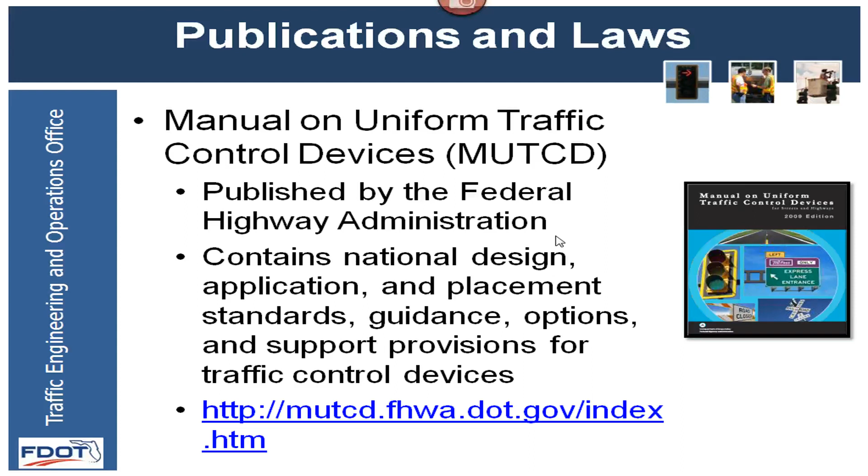Thank you, Raj. Yeah, as Raj said, the Manual on Uniform Traffic Control Devices is kind of our adopted manual. It's published by the Federal Highway Administration. This contains all national design applications and standards, kind of the paving for any traffic control devices that we use. Now Florida does go above and beyond with some special guidance and criteria, and we'll mention some of that within our traffic engineering manual, some of our rules, and some of our design standard index in other slides.

By definition from the MUTCD, a traffic control device is a sign, signal, marking, or other device used to regulate, warn, or guide traffic, placed on, over, or adjacent to a street, highway, private road open to public travel, pedestrian facility, or shared use path. So we will do our best to break that down into 3 areas - signs, pavement markings, and signals - and give you an overall perspective of what those are.

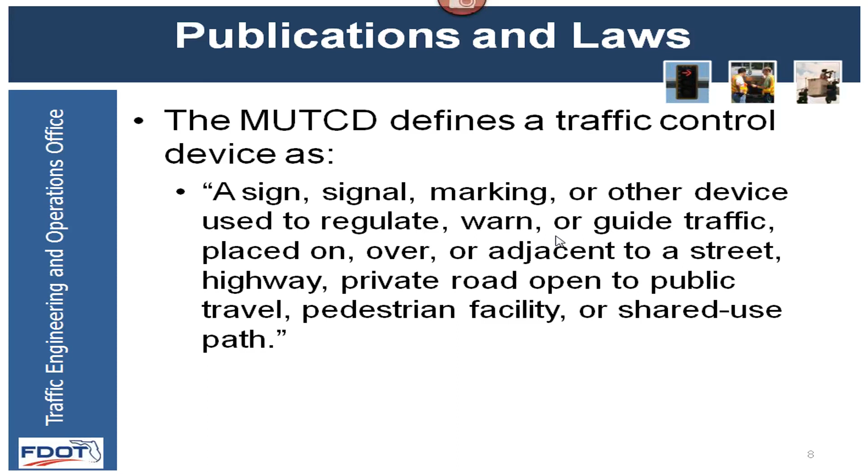And I think Angela's going to mention some more information on this. Yeah, so we get a lot of requests for traffic control devices on state roadways, and local agencies do as well. According to the Manual on Uniform Traffic Control Devices, in order for these to be effective, they've got to fulfill 5 basic requirements: the traffic control device must fulfill a need, command attention, convey a clear and simple meaning, command respect from road users, and give adequate time for proper response.

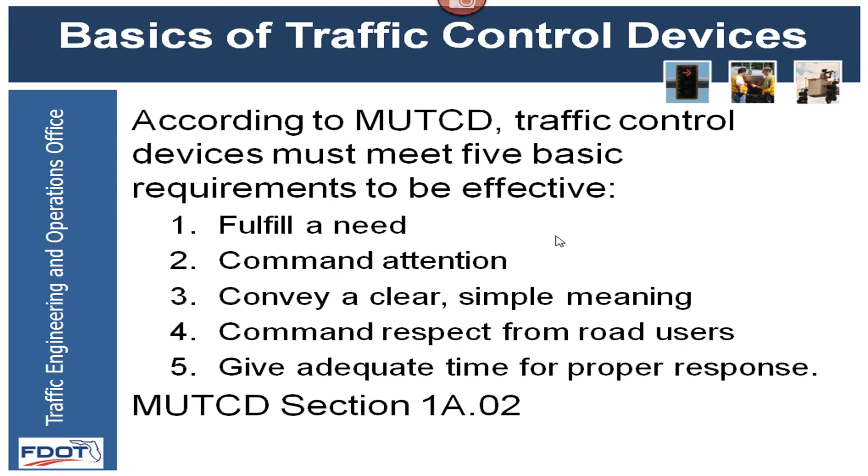So as I mentioned, we may field a lot of requests from folks who've got good intentions about installing new traffic control devices along roadways that they think might make the road safer. But if there's not a need that we're fulfilling, or if we're not conveying a clear message, those traffic control devices may not be effective and may not have that effect of improving safety on the roadways.

All right, thank you Angela. This is one of our documents that we publish from the department side, the Traffic Engineering Manual, also known as the TEM. The purpose of this is to provide traffic engineering standards and guidelines to be used on the state highway system for our designers. I did a presentation on this back in July at the Design Expo, and gave a 101 on what the TEM was. I learned quickly when I joined the department that I didn't know what the TEM was, so coming from the design side, I had a feeling it would be a good exposure point at that time. So we did a little 101 session then, and we'll probably do some more in the future, but this is kind of where we hold our guidance for traffic operations.

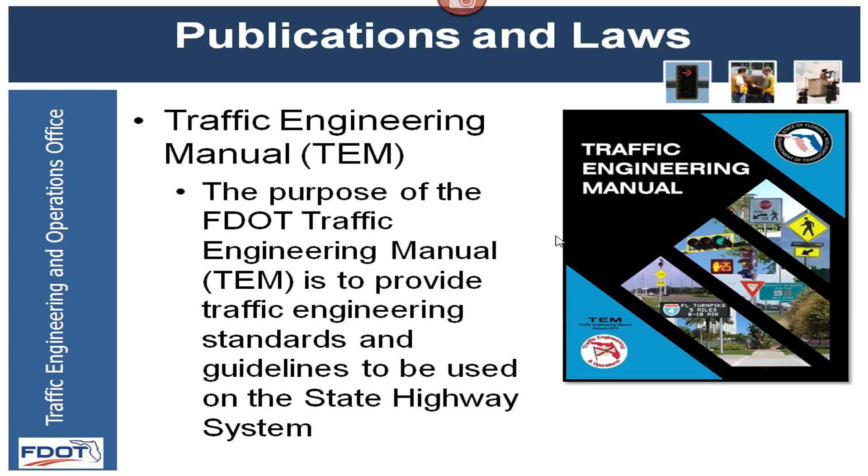And also, I think Raj is going to help me tag team this.

This is where we get to talk about our products and what we allow out there on the state highway system. All traffic control devices installed on the state highway system, as far as material, have to go through proper testing, meet specifications, and be listed on our approved products list, which I think we still kind of call the qualified products list also.

Right, correct Raj? If I can add to what Chris mentioned, we have the Traffic Engineering Research Laboratory, or TERL, that is part of the Traffic Operations Division here in Tallahassee. It's a pretty intense laboratory where all kinds of experimentation is done before any device is approved for use in the state of Florida. Any traffic signal you see, any material used on signs and pavement markings, everything is more or less approved and becomes part of the APL.

Now there may be situations where a new vendor comes up with a specific product, say for wrong-way incidents—we've been hearing a lot about wrong-way crashes lately. We have several vendors who want to showcase a particular product for application. When that takes place, as a temporary aspect, the TERL office will do all the testing and may decide to approve a permit for testing the device at a specific location for a specific application. That may not be on the APL, but it goes through a permitting process. All said and done, almost all the devices you see out there with large-scale application are part of the APL, the approved product list.

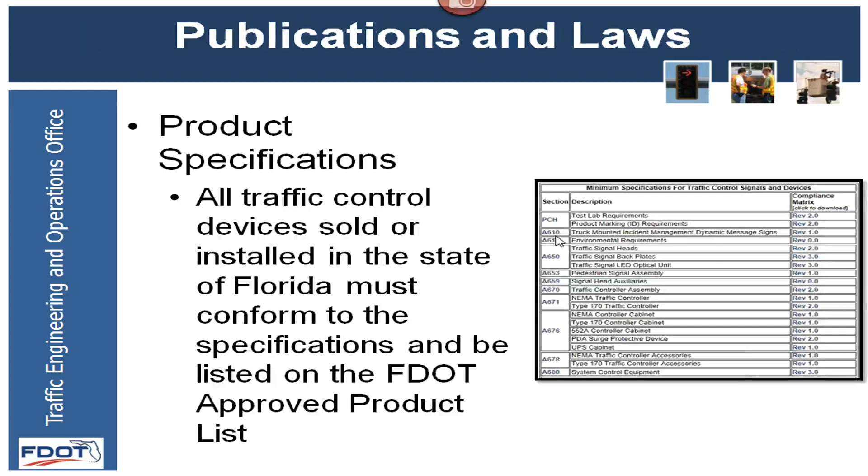Okay, all right, signs. Kind of jumping into the agenda, the meat of the agenda. Part 2 of the MUTCD talks about signs.

These are broken up into quite a few sections. I'll do my best to give a basis as to all these, and again, if there are any questions, stop us. This is the starting ground for the department and how we come up with our guidelines for the Traffic Engineering Manual and the Design Standards Index, as far as any kind of signs and anything we're putting out on our state highway system. And it's not just limited to static signs—we also deal with dynamic message signs, portable changeable messages, and so forth.

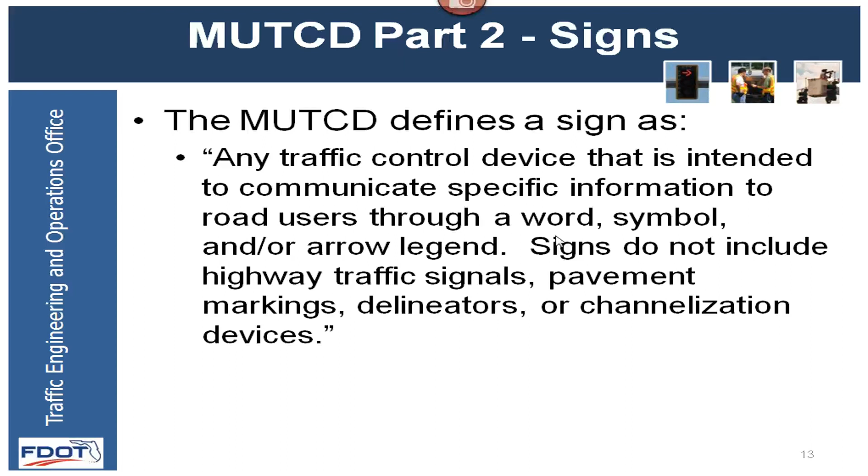Next slide. Okay, the definition of a sign from the MUTCD is any traffic control device intended to communicate specific information to road users through word, symbol, and/or arrow legend. Signs do not include highway traffic signals, pavement markings, delineators, or channelization devices. So there is a difference.

Like I said, the MUTCD kind of breaks it up—I called it subchapters, I didn't know if there was a better terminology, but there are 13 of them. It talks about regulatory, warning—there are 2 sections on guide signs, one for conventional roads, freeways, and expressways. Toll road signs, preferential managed lanes or managed express lanes would be an example. General information, general service, we get into logo signs, TODs or tourist-oriented directional signs, changeable messages as I mentioned earlier, recreation and cultural interest areas, and emergency management.

Within those areas, the department does a good job condensing that. We have a Florida Administrative Code—I've got a slide on that I'll bring up—that's our state highway signing policy, and I think it's 5 parts. We have limited access, non-limited access, we talk about place name signs, wayfinding, and our TODS program in there.

As far as regulatory and warning signs, we do refer back to the MUTCD on that. We don't get real specific as to anything proprietary to DOT for that—it's a national thing we go by. All sign placement and installation purposes are done per the MUTCD. We don't have any specific extra information we produce for that stuff.

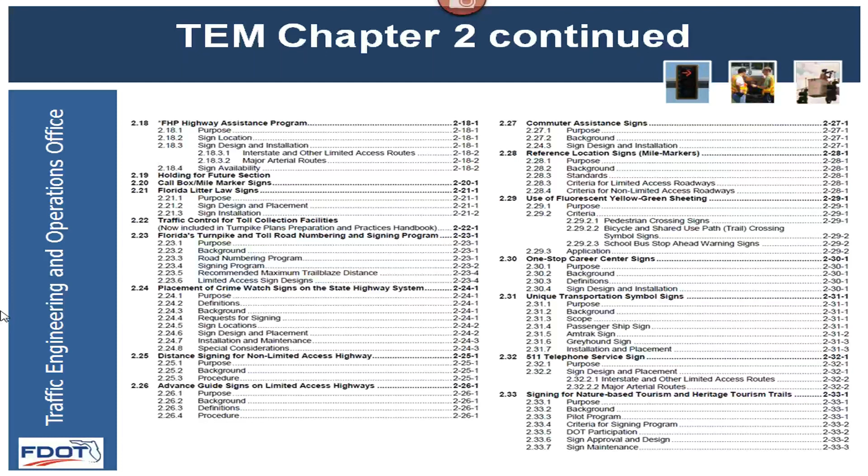And of course, going to the end of it, we're always adding to this. This is not like some of the other manuals you might be used to, PPM, Florida Green Book, which are updated annually. This can be updated on the fly. That's the great thing about the traffic engineering manual.

And again, it's guidance. If you're going to use this or participate with this language, there are shalls and shoulds in here. So if you do use these sections, make sure you're following the verbiage in there. But again, I would encourage anybody, if you're not on the mailer list, please get on it. You can email Raj, myself, Angela, or contact us here, or I'm sure Dennis has our information. We'd be glad to add you to that list.

Okay, and like I mentioned, coming off of the MUTCD, we have a Florida Administrative Code, Rule 1451. This goes through a rulemaking process. We are currently in there right now from last year. We did an update to it. We did several updates to it. But you can see the layout and the breakdown for it.

We've got a major revision, overall review of this last year, and like I said, it's going through the process in December, and it should complement some of our other manuals within the department.

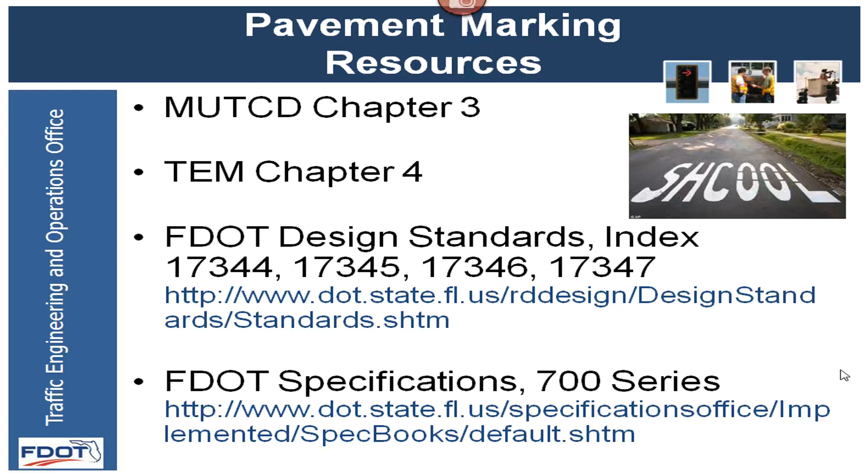Raj just asked if I want to elaborate on the school example. Somebody may think that we put it there by accident. No, that was the example I gave of when markings may go in inappropriately, and hopefully this was just a mistake and not somebody trying to put 'cool' in 'school' or something silly like that. And of course, this was not on the Florida State Highway System - correct, this is just on the Google system.

Moving into the MUTCD guidance, there's a lot of good guidance in the MUTCD - I'm just going to highlight a couple items here. The colors of pavement markings: right now, the only approved colors are yellow, white, red, blue, or purple. Black can also be used in conjunction with some of these colors to provide additional contrast.

We've also added green for bike lanes, sorry that wasn't included here in the slide. In general, most folks know that yellow separates opposite directions of traffic, while white typically separates traffic in the same direction of flow. Red you may see in one-way conditions where it's a do not enter - typically we'll use those in the RPMs where one side is red facing the wrong way traffic. Blue we use for disabled parking and also with RPMs near fire hydrants in the state of Florida.

Purple is typically used in preferred, managed, and toll lanes. There are some in South Florida pavement markings, and it will likely be included in the I-4 Ultimate project in Central Florida - I'm not sure if the Tampa Bay area has managed toll lanes yet. I was just going to highlight black being used for contrast markings - we've got some lighter pavement where white doesn't show up as well, so we'll typically use black for contrast either as a border around the white or as a shadow. There's a couple different applications.

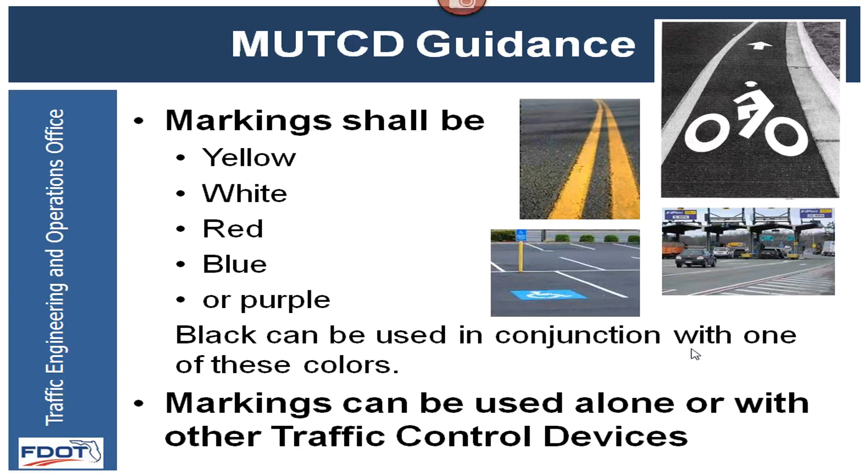Moving to the next slide, we've got an example of some striping guidelines located in the DOT Standard Index, outlined in the special markings area. Most of the striping we see here is about 6 inches wide. We've got double lines separated by a 4-inch gap. The 2-4 skip on the left side is typically used through a left turn path at an intersection. The 10-30 skip on the bottom left is typically just a standard lane separation when you've got 2 lanes. The white skip line doesn't look like it's 10 feet long and 30 feet between them, but it certainly is.

The 6-10 skip up on the right side is used usually across turn lane tapers, and then the solid white is seen approaching stop bars at signals. That 3-9 skip in the bottom right corner, or sometimes called the dotted line in MUTCD applications, can be used for lane drops at interstates to distinguish a lane that's being dropped from a normal exit ramp.

Usually those are used in locations where we've got at least a half mile in advance of that theoretical taper. But in general, pavement markings can be an effective way of visually guiding drivers through their path. If you're looking at a road without any pavement markings, you've got a whole bunch of black asphalt, but adding those lines can really provide guidance to drivers as to where they need to be.

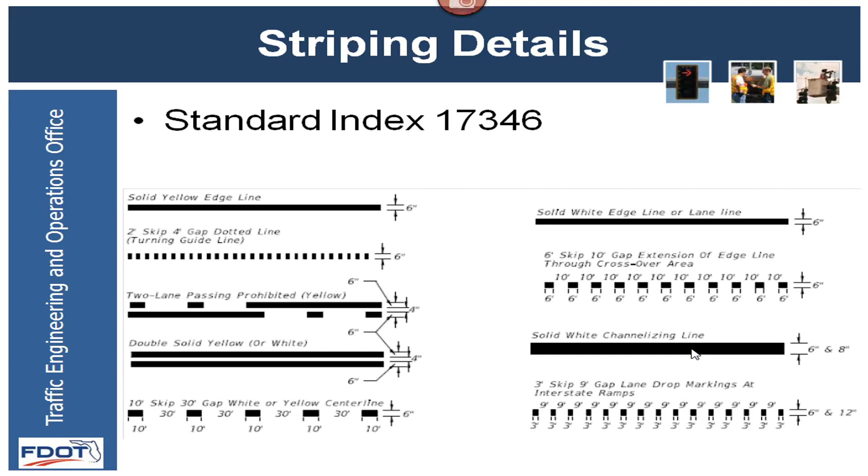We've touched on this a little bit, but if we're going to apply any non-standard marking, those need to go through a request for experimentation process with central office, engineering and operations, and the Federal Highway Administration. Our office works with the district to apply for these.

I know in the District 7 area, we've got one right now. We're waiting for approval on the red rectangular rapid flash. Oh, we did receive this - it's just in. We have approval for the flashing do not enter sign to prevent some wrong-way crashes. So really that's the process for evaluating the effectiveness of any new device. Typically those also require a before and after study to ensure that they work appropriately.

Relating this back to pavement markings, we've also got an experiment with in-road red wrong-way arrows up in the Panhandle area as well.

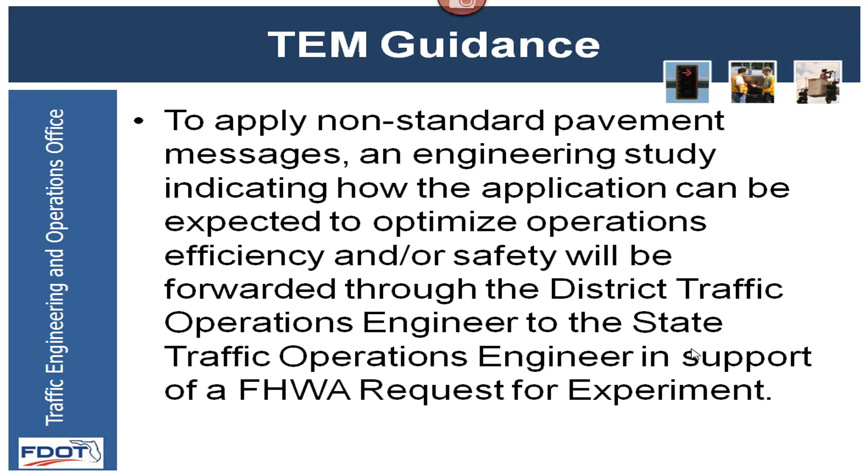So with that, I'll go into a little bit of detail about the types of pavement markings that we use here at the department. The several slides that I'll go through have been adapted from material presented by the DOT Design Office. If you've got questions, feel free to type them in or hold them to the end, and we'll see what we can do to answer those.

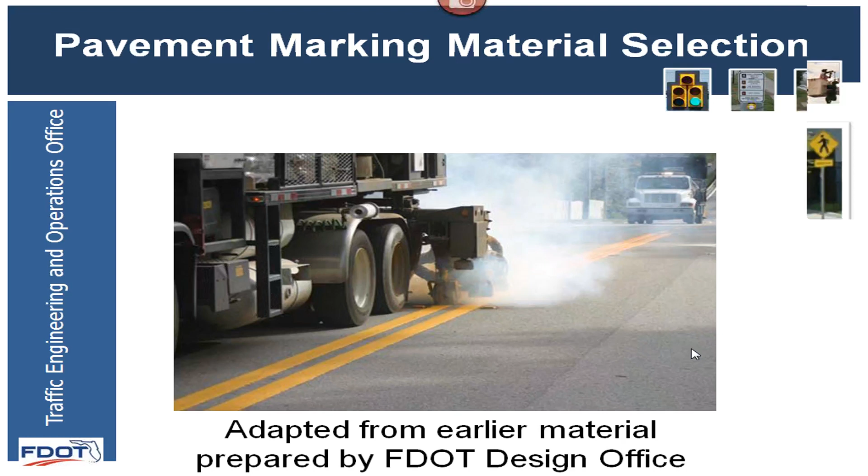So we've got several different types of markings that we can select from. In the next slide, we'll just touch on some of the considerations that apply to all markings, and really those refer back to visibility. Pavement markings can't really provide information to drivers if drivers don't see them.

When we're considering the visibility, we also want to consider the lighting, so nighttime, and also weather. Some types of pavement markings aren't as visible in wet conditions.

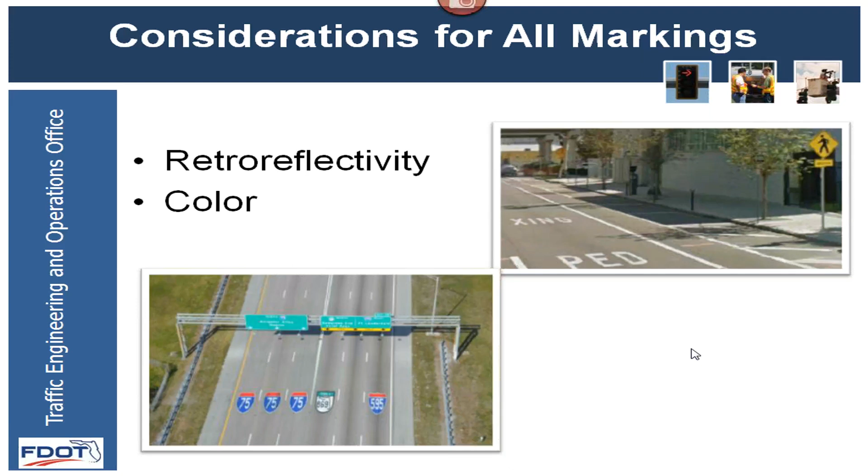We're going to go back a couple slides. Sorry about that - this one? Sure, that's fine. The other item is color, and as we discussed earlier, color can convey meaning. Thanks, now we're back on track.

There are several different types of reflectivity. The one that we talk about mostly when it comes to signs and pavement markings is retroreflectivity, which really just means that when the light hits the surface, it reflects back to the driver's eye, or back to the source of where the light came from.

So one of the techniques that we use in our pavement markings is adding beads to the pavement markings to help increase that reflectivity and visibility in certain conditions.

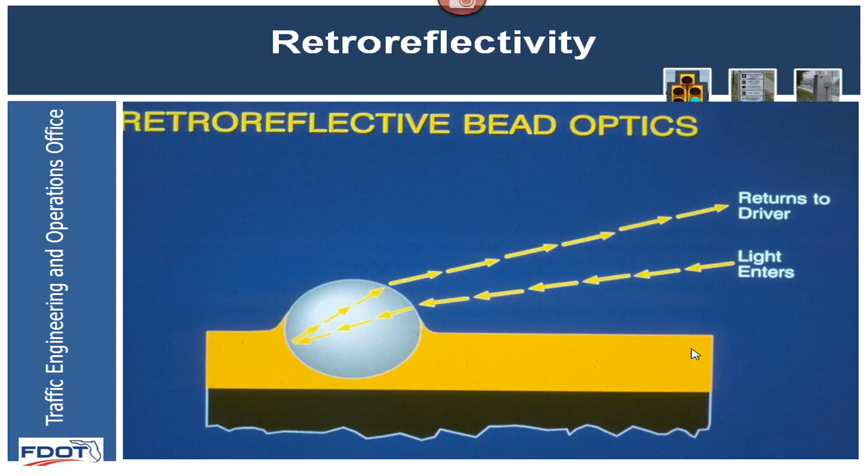Some of the types of pavement marking materials that we have are paint, thermoplastic, preformed thermoplastic, high-performance tapes, which we're not really going to touch on too much here, and audible and vibratory markings. So we'll cover a few of those options for pavement markings here.

The first will be paint. We're all pretty familiar with how paint works - it's a common household item. We paint our houses, we paint other things, we paint roads. Unfortunately, it doesn't hold up as long as some of the other types of markings and other materials that we've got.

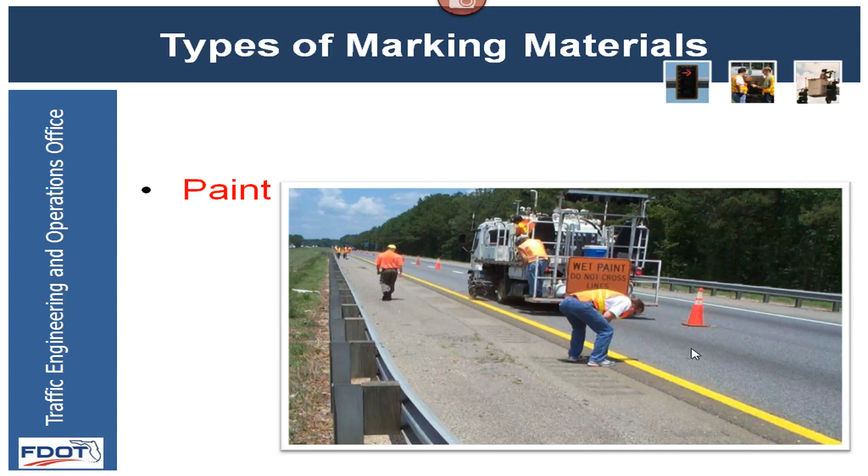So next we'll talk about some of the primary uses. Because paint markings get run over all the time, we want to make sure that they've got a long enough life that we're not out there repainting the surface of the roadway regularly. So paint's got a shorter service life than some of our other types of markings. For that reason, we'll use it for short-term projects like maintenance of traffic and some contrast markings. As I mentioned, some of the limitations include the service life and the visibility - when you're in wet conditions, it can be tough to see paint.

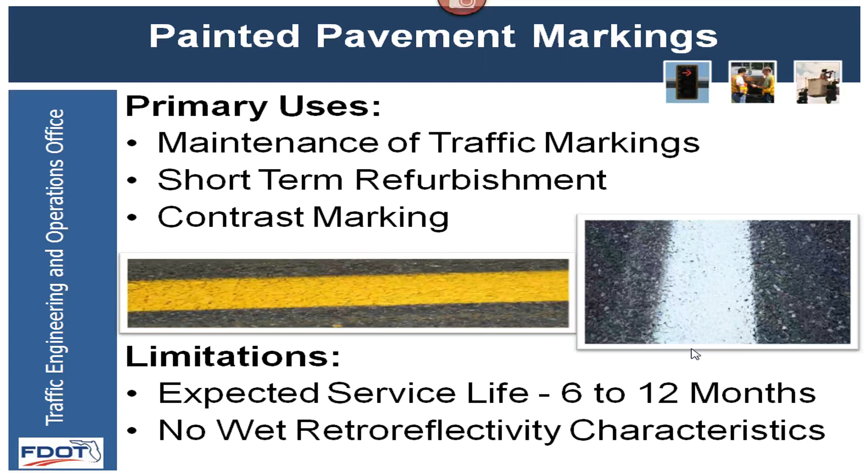The next material that we'll cover is thermoplastic, which is probably one of the more common materials that we use on our roadways. It's got a higher reflectivity. It's applied super hot - I think it's over 400 degrees. We've got to heat that up when we're binding it to the pavement.

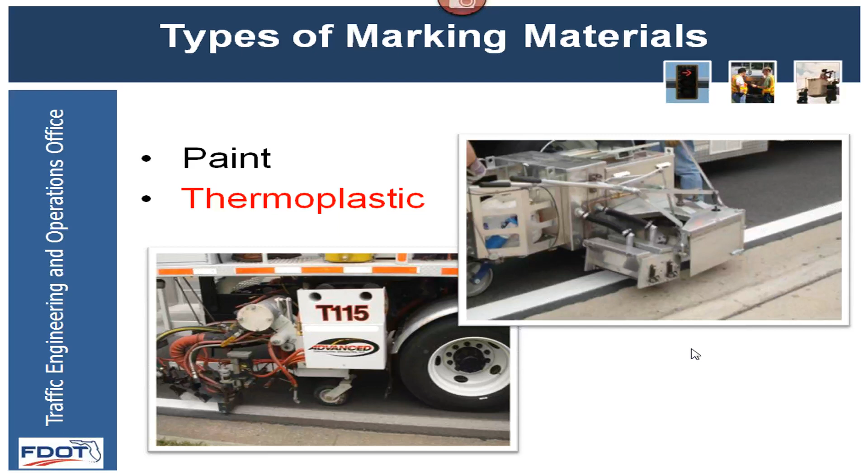So we also include glass beads in the thermoplastic, which contribute to higher reflectivity levels. And as logic tells us, better visibility leads to improved safety, so these can be effective.

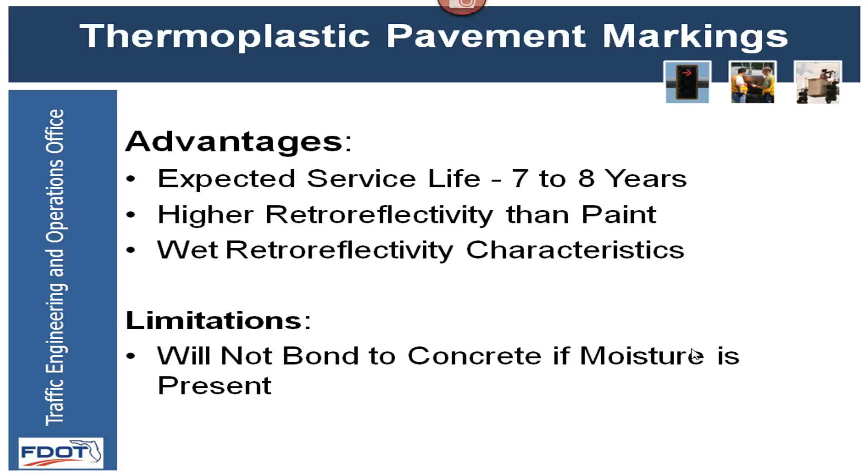Other uses of thermoplastic include edge lines, lane lines, stop bars, messages and symbols. The advantages of thermoplastic over paint include a longer service life, higher reflectivity, and better visibility in wet conditions. One challenge is that it doesn't bond well to concrete if moisture is present.

From regular thermoplastic, we'll move to preformed thermoplastic, which you can think of almost like big stickers that come preformed. We heat them up and apply them to the pavement. We typically use them for applications such as exit ramp numbers, bike symbols, crosswalk markings, and pavement messages.

We've recently added a section in the Traffic Engineering Manual, section 4.2. We're currently updating 4.2 — the old title was very long and convoluted, so we shortened it and added language on route shields and pavement markings. Look for that within the next month or so. It'll go hand in hand with some spec changes and design standards updates in the roadway design office. It's not a new section, just a new revision, with detailed information referencing MUTCD standards, but also our specific requirements for the state highway system in Florida.

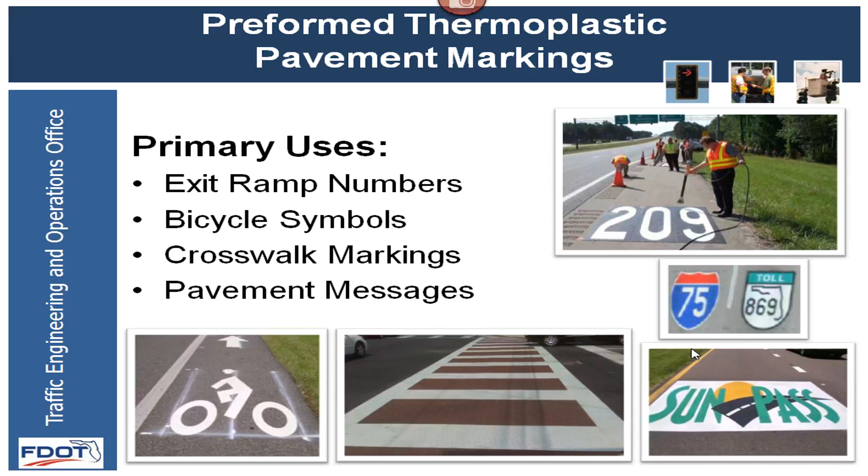Along that line, there's currently research going on related to elongated pavement markings and their effectiveness. We've looked at some research from TTI, and Raj and I have reviewed some reports on that in the past, so we're still reviewing it.

One of the other options we've got for materials is permanent tape, which is typically used for center lines on concrete. One of the benefits is that it performs better on concrete than thermoplastic will.

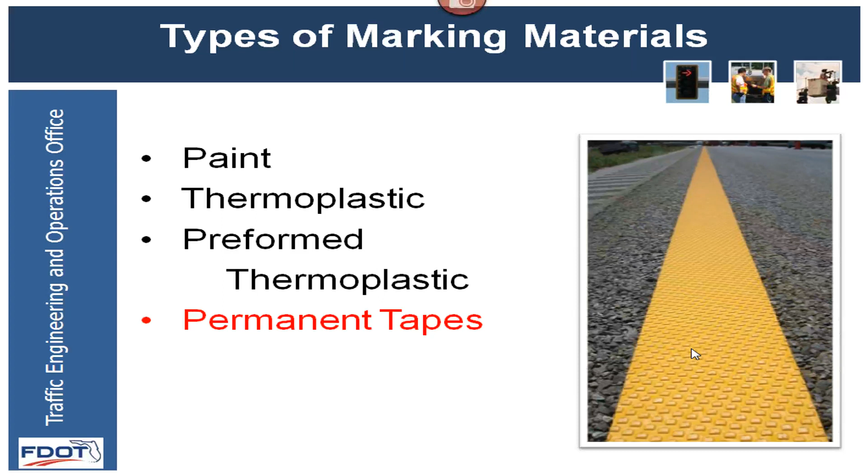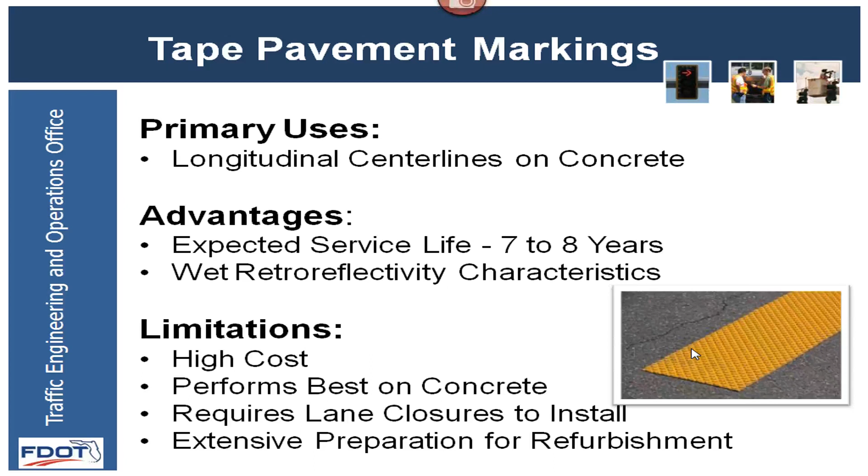We'll just touch on some of the advantages — they've got good reflectivity, though they're a little more expensive. They perform best on concrete, but because they're more difficult to install, they require more preparation. You'll see a lot of these on bridges and similar structures, and anywhere there's rigid pavement throughout the state highway system. We're under 200 lane miles of concrete or so — it's not a lot — but that's a bit more information on it.

The last material for pavement markings we'll cover is audible and vibratory markings, often applied to promote safety. In locations with lane departure crashes, they can be effective in reducing lane departure — if somebody isn't paying attention or dozes off, as they cross that edge line, the audible marking will physically make the car rumble, so they hear it and pay more attention.

Typically, the uses we've applied up to this time are in rural two-lane corridors. Some examples: there's SR 40 in the Ocala Forest in District 5, and I read that District 7 has over 150 miles of audible and vibratory markings. We're applying them in the Tampa Bay area as well.

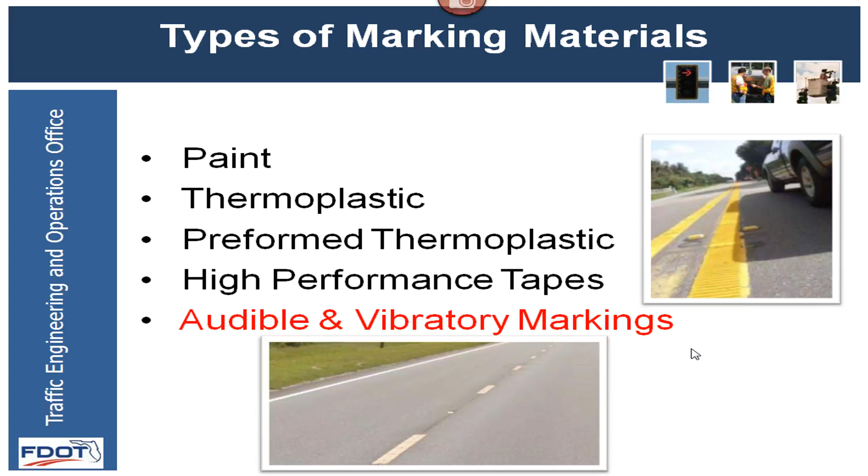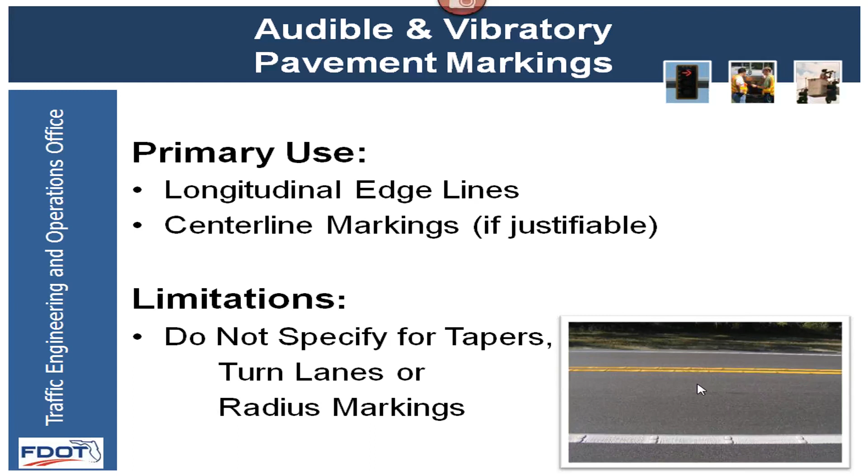Typically they're used for edge lines, but can also be used for center line markings if we've got a series of head-on crashes. Some limitations — we don't want to use them on taper areas or locations where drivers are required to cross, since they make noise and we're trying to deter drivers from crossing them.

I just want to show you a couple of options we use. On the left, you'll see the ground-in rumble stripes, versus the raised type on the right, sometimes called cookies. So we've got some that are depressed and some that are raised.

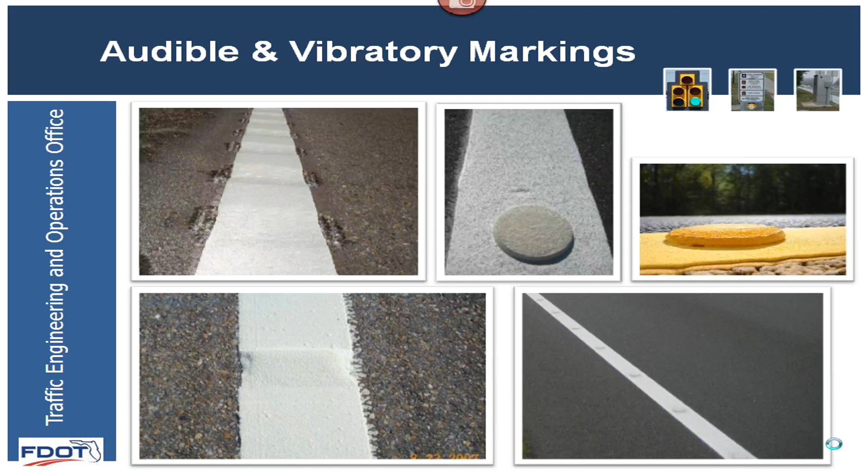I believe the DOT Design Office is working on language for further implementation of this type of marking. That'll come out with the pavement design guide material we've been putting together in conjunction with the design office. Whenever that's finished, it'll be placed somewhere and made known, whether through a bulletin memo or something.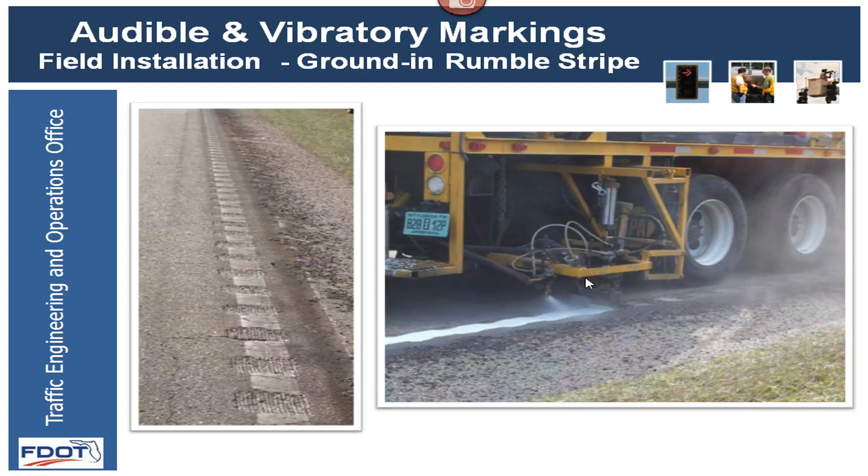When we started thinking about this presentation, we were really thinking that we should focus on three aspects, namely signs, pavement markings, and traffic signals, because that is usually what most of us would like to touch on when we think of traffic control devices.

Following the same format which Chris and Angela did, we'll begin with the MUTCD, which is where everything begins when it comes to traffic signals and all traffic control devices. I strongly encourage any colleague working with traffic control devices to take a peek at the MUTCD, because there's a wealth of information in there, particularly on signs, pavement markings, and traffic signals. There's also railroad crossings and work zones and so on and so forth.

But essentially, from a traffic signals point of view, MUTCD specifies various criteria that need to be followed, including a signal warrant analysis.

Before coming to that, let me first touch on the Manual on Uniform Traffic Studies. Though this is not directly related to the presentation today, it is worth going through the MUTS manual, which is available on the Florida DOT website. The reason I'm highlighting this is because anything we do in traffic engineering and operations needs to be done through a comprehensive engineering study, and the MUTS manual provides a comprehensive assessment of what needs to be done in terms of studies. One of the most integral chapters in the MUTS is with respect to conducting signal warrant studies, and that's why I thought it important to mention the MUTS manual.

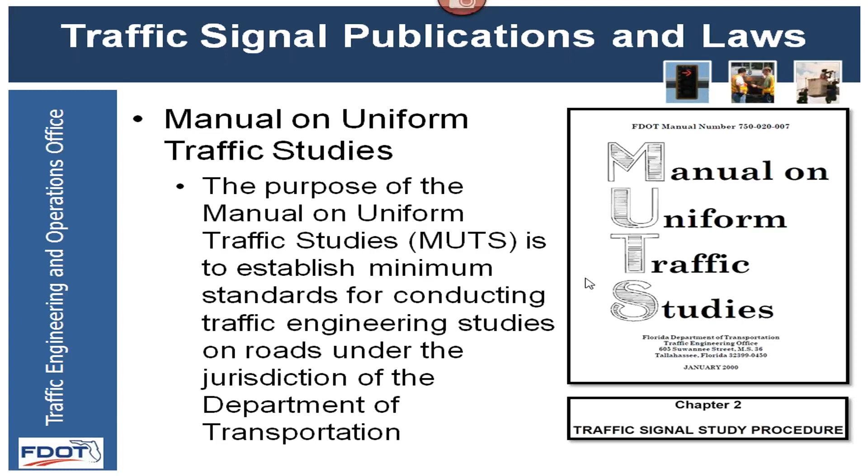As a matter of fact, the MUTS manual is going through an updated version now. It's being revised as we speak, and probably the final version would be available by the end of this year, if not January of 2015. Having said that, Chapter 2 of the MUTS manual provides a comprehensive assessment of conducting traffic signal studies.

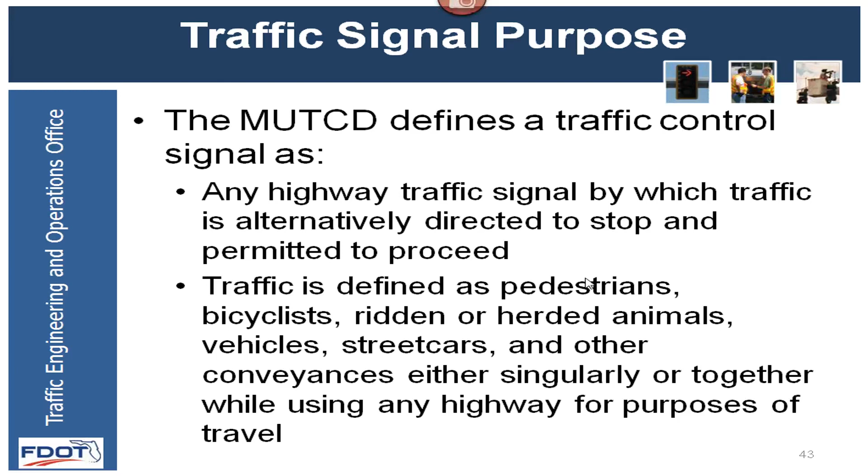Coming back to the MUTCD, long story short, the definition of a traffic signal in MUTCD is any highway traffic signal by which traffic is alternately directed to stop or permitted to proceed. Traffic is defined as pedestrians, bicyclists, and a whole range of modes that actually use a roadway to traverse the segment, for purposes of travel. It's interesting how MUTCD defines it.

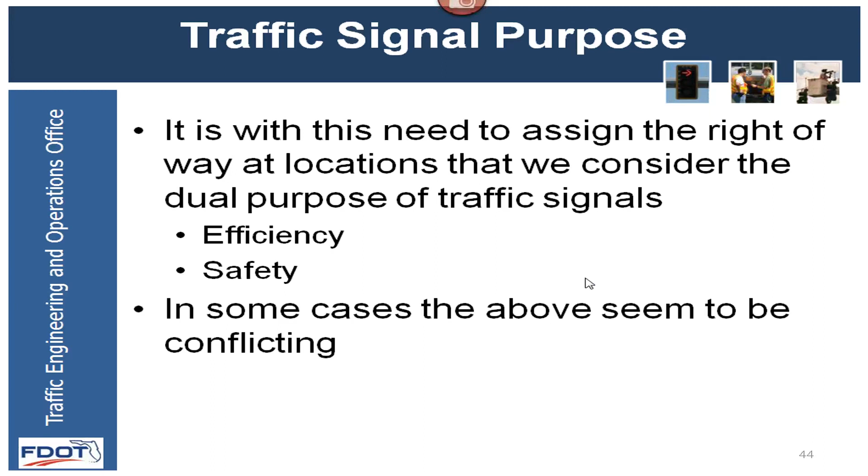It is within this need to assign the right-of-way at locations that we consider the dual purpose of traffic signals. In other words, the intent of a traffic signal is to provide efficient and safe operation through any highway or roadway. A traffic signal is not the answer to all the questions, because there is a feeling that a traffic signal needs to be there—but it just cannot be there. There needs to be a comprehensive assessment through a signal warrant study, which I'll touch on in a minute.

The MUTCD also defines traffic control signals—in other words, MUTCD says we have to be very careful, because sometimes traffic signals can be ill-designed. That means the purpose of moving traffic efficiently and safely may be overlooked, and that is something we definitely should avoid. A traffic control device can sometimes be ineffectively placed, at wrong locations, which again is not something we would like to see.

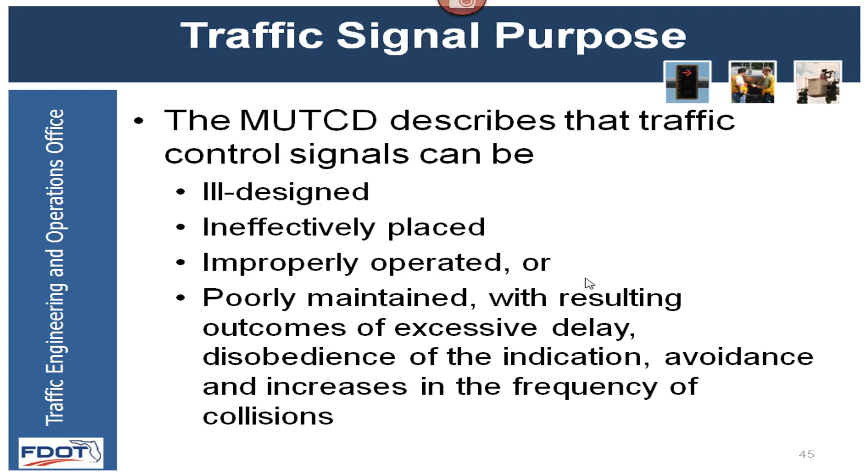It should not be improperly operated. A traffic signal should provide the most efficient movement, and that means optimization is one important aspect of running traffic signal systems. A traffic signal should not be poorly maintained, because poor maintenance results in excessive delay. People tend not to follow the traffic signal if it is not properly placed, and this can also lead to a very unsafe situation.

On the other hand, a traffic signal, if properly designed and timed, can actually provide an efficient movement—not just of vehicles, but of all road users, namely pedestrians and bicyclists and every other mode conceivable. It effectively maximizes the volume of traffic that moves through that particular intersection.

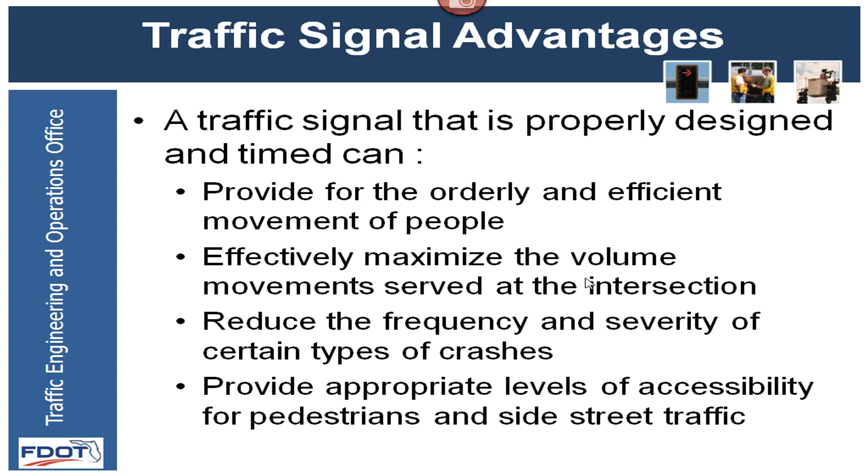It also helps to mitigate traffic crashes if we use the right kind of application when it comes to traffic signals. And last but not least, it improves accessibility to all modes, including pedestrians, particularly with reference to side street traffic.

I say that because often we try to improve progression through urban corridors, and we tend to forget about the impact on the side streets. As we move towards more active arterial management, which is something we are pursuing now, the focus is not just going to be on the main streets, but also on the side streets and how to minimize the delay from them. That's a different topic for a different day, but I thought it was important to touch on.

From a disadvantage point of view, as I said before, if traffic signals are not properly designed and deployed, they can lead to excessive delays. That can also lead to people disobeying the traffic signal, which means it also increases the use of less adequate routes that are available. And last but not least, it can increase the frequency of collisions, particularly rear-end collisions.

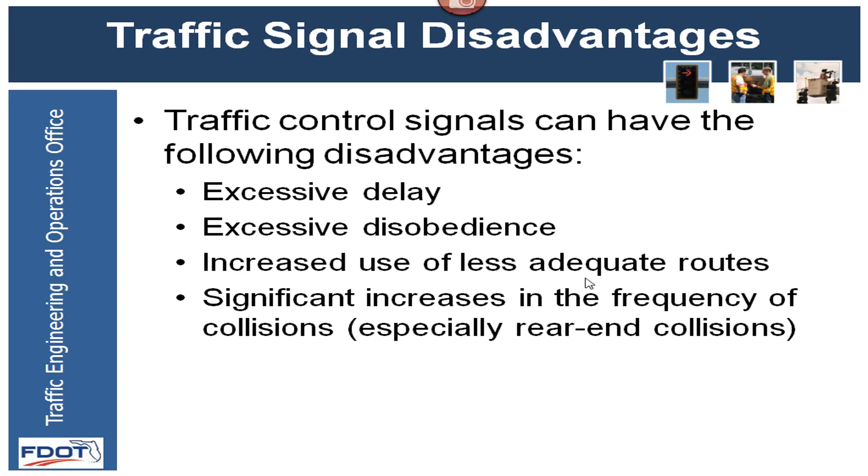So when we get a request for installing a traffic signal, one of the first things we have to think about is, if we install a traffic signal at this particular location, is it possible that rear-end collisions are going to go up? Usually that answer lies in conducting a comprehensive signal warrant analysis.

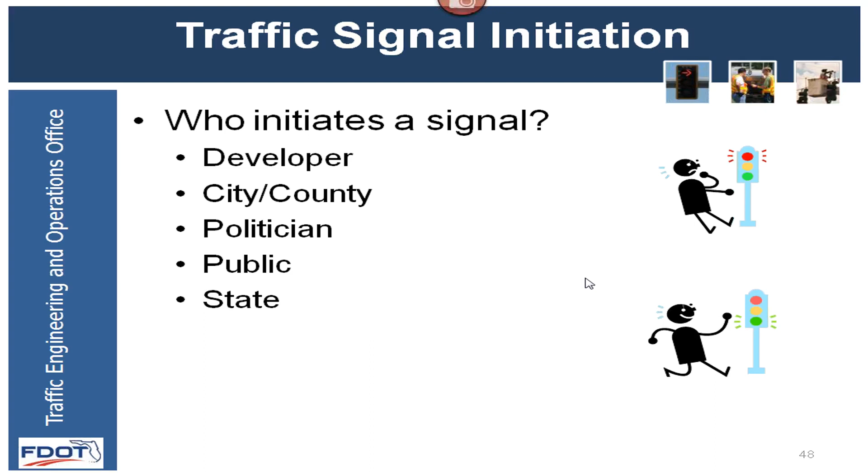So who initiates a signal? Essentially, any developer who is developing a particular area may need to provide a traffic signal, so a developer may request one. A city or county may decide that a traffic signal has to go in, and elected representatives can also suggest the need for one. Of course, the public also feels that because they're driving through an area, a traffic signal may be needed, whether in school zones or any other area. And last but not least, the Florida DOT regularly reviews every single customer complaint and citizen concern, and then decides if a traffic signal is warranted at a particular location.

Now, as I said before, at the end of the day we have to conduct a comprehensive signal warrant analysis before any traffic signal can be implemented, deployed, or installed. The MUTCD prescribes 9 specific warrants. I'm not going to go through a detailed explanation of all of them since we can all review them, but essentially, if you look at the MUTCD manual, the Manual on Uniform Traffic Control Devices, there is a comprehensive assessment of what should be conducted to do the signal warrant analysis.

The first warrant deals with 8-hour volumes—in other words, during 8 peak hours of the day, what is the traffic like? The next warrant relates to 4-hour vehicular volumes. The third one is about peak hours. So we're looking at 8 hours, we're also giving a chance to look at 4 hours, and we also want to see what is happening during the peak hours.

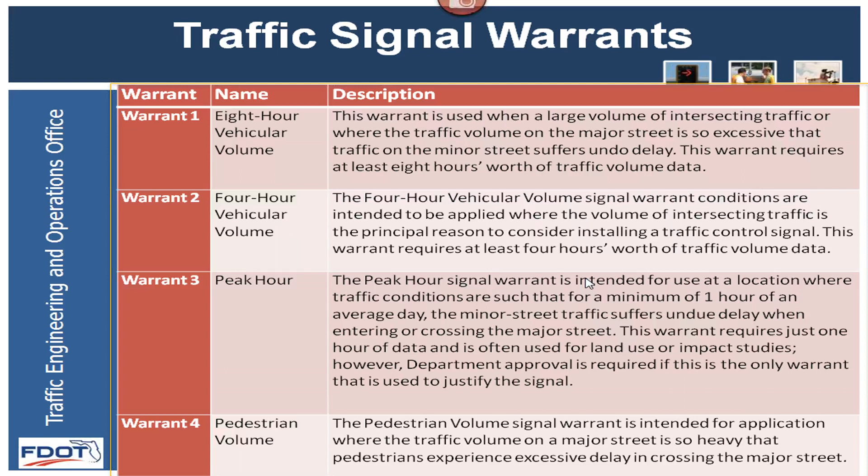The important thing to note is that there's also a warrant on pedestrian volumes. The pedestrian volume may be so high that you may in fact need a traffic signal at a particular location. School crossings constitute an important part of this study. If there's a coordinated system, you want to take a look at it. Crash experience is also a very important aspect.

MUTCD says that if there have been 5 traffic crashes during the last—I think 3 years, we need to check this—then you can provide a traffic signal, provided those crashes are susceptible to correction through the installation of a traffic signal. In other words, anybody who does a signal warrant study is going to look at the crashes, the type of crashes, and if a signal is installed, whether these traffic crashes can be mitigated as a result. So that is one important aspect that is reviewed as well.

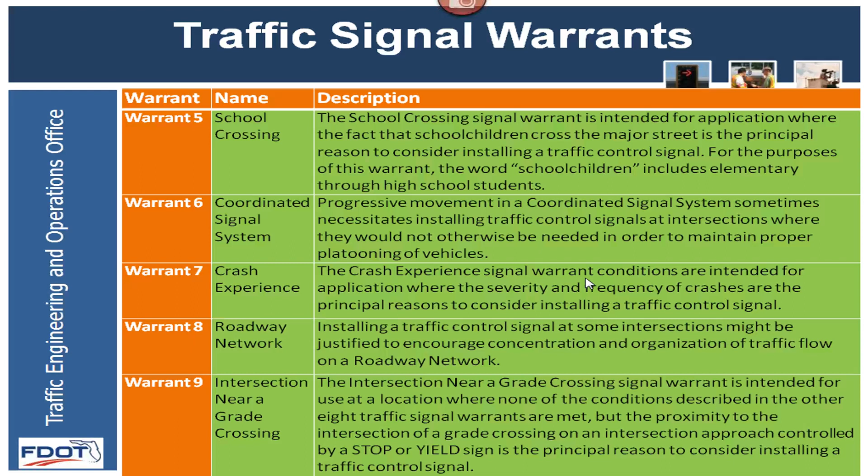The roadway network, and of course the intersection near a grade crossing. The bottom line is, even if all 9 warrants are met, essentially the location only qualifies to have a traffic signal. Now, a word of caution—having said that a warrant is met and a traffic signal may be needed, that does not necessarily mean you go install the traffic signal. The professional engineer who signs and seals the study has to call engineering judgment into the picture and see if a traffic signal is in fact the correct method of treating that particular location.

Now, I know that Chris and Angela touched on the traffic engineering manual.

Everything contained in the MUTCD is followed, except that we provide a better clarification on what needs to happen with respect to traffic signal implementation and operation in the state.

I can pick a couple of important ones that have been of interest during recent times. For example, if we take a look at Section 3.8, that talks about mid-block crosswalk, and the last 5 or 6 slides of my presentation are going to be on this one, so hold that thought. Section 3.6 on yellow change and red clearance interval also provides a very direct, hands-on implementation process for every single traffic engineer who deals with traffic signal timing in the state.

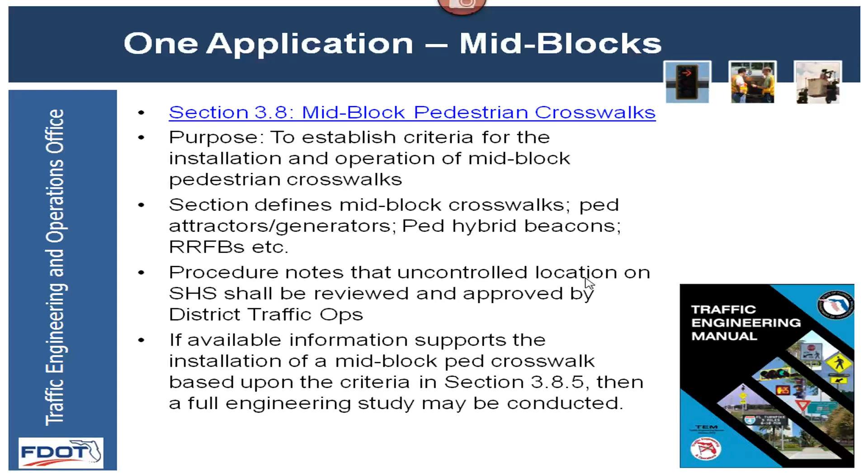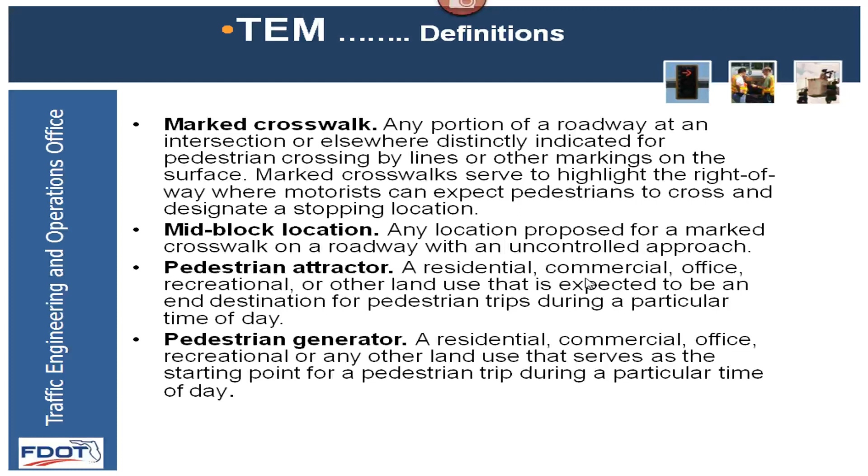There are some broad definitions contained in the traffic engineering manual. I'm not going to go through that, except to say that the more recent ones, which we are all hearing about, are the pedestrian hybrid beacons and the rectangular rapid flashing beacons, the RRFBs. These have been applied for some time now, recent additions to traffic control devices that are being applied.

Essentially, a pedestrian hybrid beacon is a pedestrian-actuated traffic control device that provides a dark indication to motorists until it is activated by a pedestrian. And when that happens, it turns into a solid red indication so that the motorist can actually stop for the pedestrian to cross.

The rectangular rapid flashing beacon, on the other hand, consists of two rapidly and alternately flashing rectangular yellow indications with LED arrays in them, which provide guidance to the driver to actually yield to the pedestrian or stop for the pedestrian.

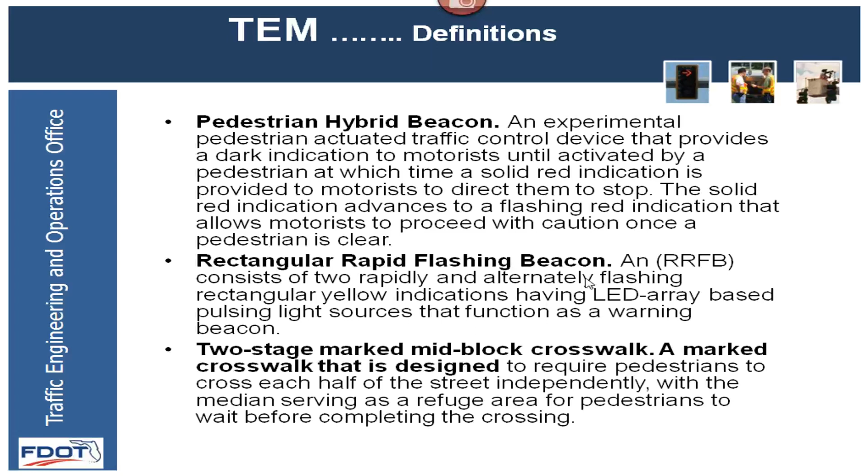The standard procedure for traffic control devices is that in every single case, the decision on installing a specific traffic control device is made at the district traffic operations engineer level. In other words, any request goes to the traffic engineering and operations office in every district, and they do a comprehensive evaluation and decide on the type of device that needs to be installed. And that is no different with respect to the mid-block crosswalk.

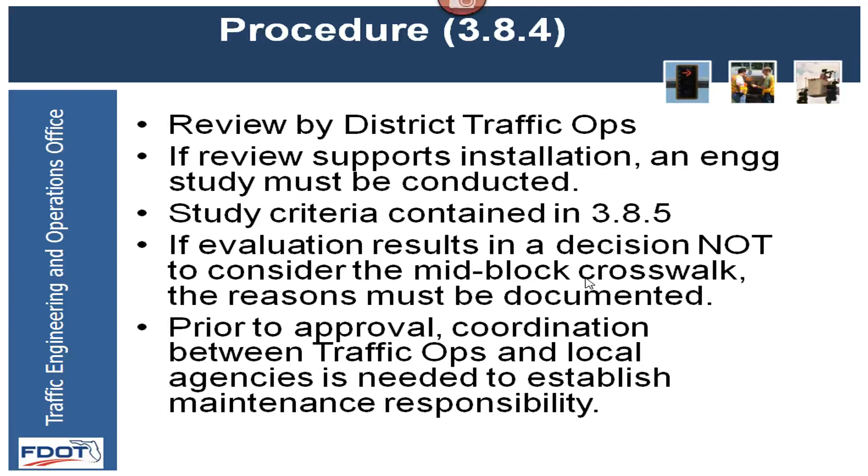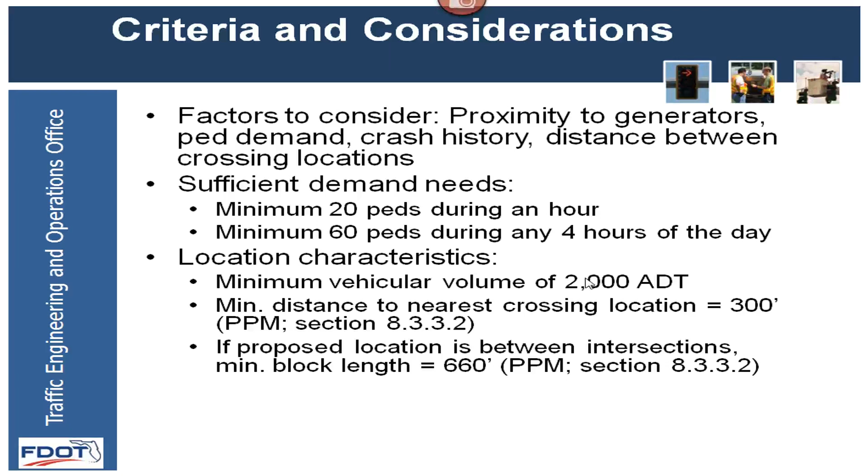Again, Traffic Engineering Manual 3.8.5 talks about the considerations in quite some detail. This presentation is on traffic control devices, so I'm not going to spend a lot of time, except to say that there are certain criteria that need to be met before any traffic control device is actually considered.

From a safety point of view, I think at the end of the day, the centerpiece to anything we do with traffic control devices is safety. Any traffic control device that will be installed, or should be installed, needs safety consciousness behind it.

You cannot install a sign on the street and then have a tree limb shielding that sign - that means the whole purpose of installing that sign is lost. We do not want to provide a traffic signal when there is no need for one, or when the volumes are low, because that is a wrong application of a traffic signal device.

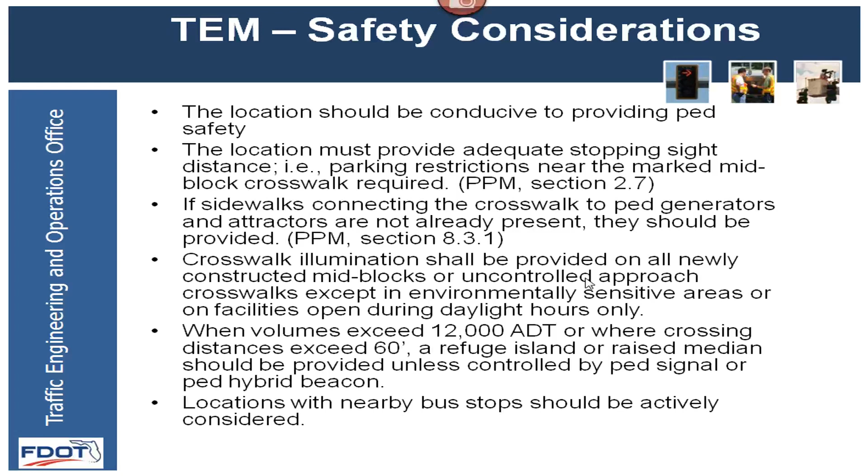We do not want to provide pavement markings at locations which are not going to meet the safety intent. So everything we do is safety driven, and there is no difference with respect to section 3.8, because there can be requests to install crosswalks anywhere, but the ultimate driving point is: do you want to install a crosswalk where pedestrian volumes are so low that a motorist may be surprised seeing one, causing a potential crash. Long story short, safety is the bottom line when it comes to any traffic control device consideration.

This is where I think it all comes together. Section 3.8 of the Traffic Engineering Manual talks about treatments that can be used. You can use a special emphasis crosswalk, curb extensions, raised crosswalks, speed reduction treatments, or signing and pavement marking to ensure pedestrian safety. And last but not least, you may consider a pedestrian traffic control signal if the warrants meet.

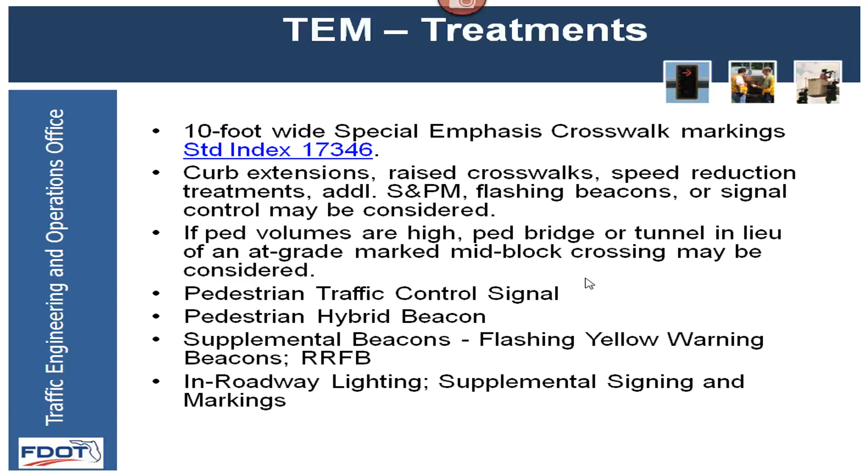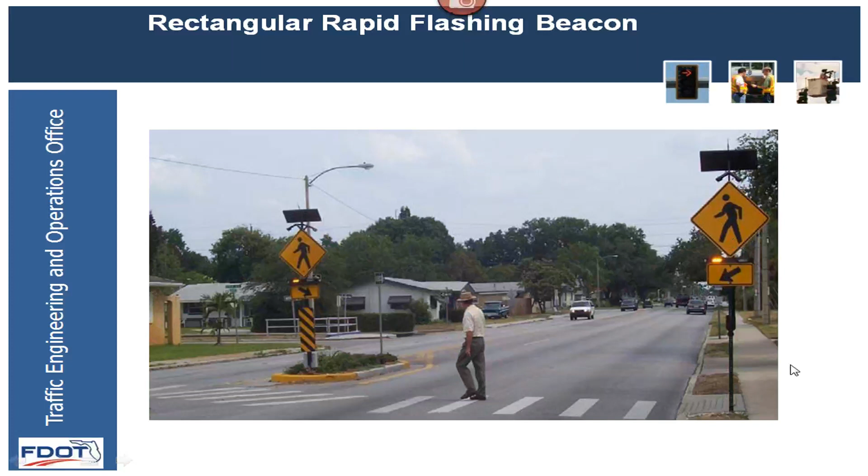Raj, if I may, if you can go back two slides to the pedestrian hybrid beacon, there's a question in the chat. Someone is asking if there's been any situations where a pedestrian beacon went into flashing red mode and motorists were confused because they're accustomed to a flashing red meaning stop.

That's a great question, an excellent question. This is a good point, Dennis and Anthony. During the initial phases, there needs to be a certain level of education, in the sense that it can happen, not that it does not happen. It would be incorrect to say it definitely does not happen.

That is where we talk about traffic volume. If you have adequate pedestrian demand and a consistent, sustained pedestrian movement, then the regular driving public—if I'm driving that corridor every day, or regularly—can guess there is likely going to be a pedestrian. Now if I'm a tourist altogether, brand new to that location, that's a different story. The short answer is that can happen, but the devices have been in use, and there have been safe applications wherever they are being used. But it always boils down to that 95th percentile, 99th percentile driver who may not react in time.

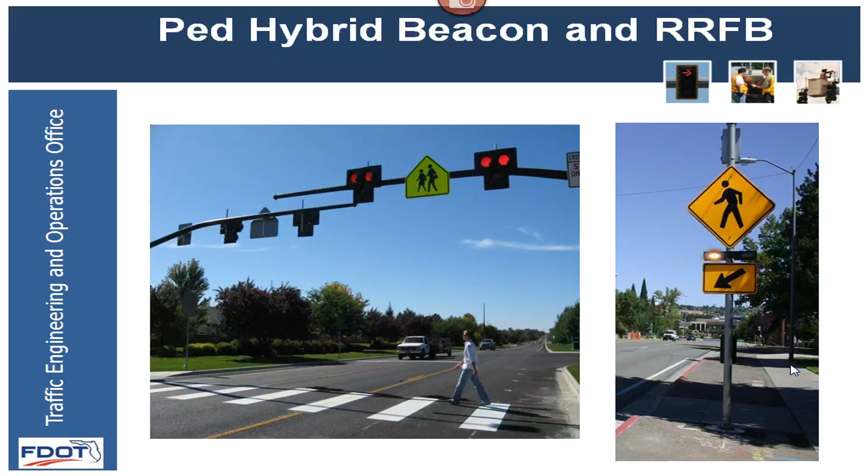All right, any other questions before I move on? There's nothing else in the chat at the moment. Did you say there is something or there's nothing? I'm sorry, Anthony, no, there is nothing else in the chat. Thank you, all right, thank you.

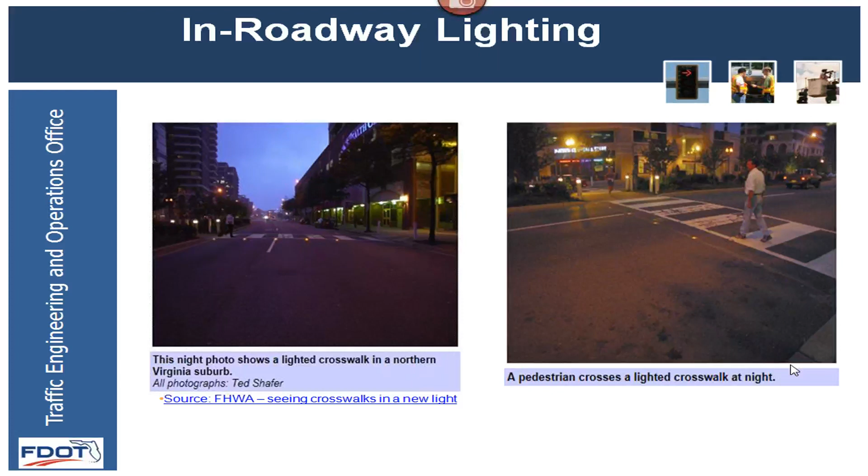So I took these couple of pictures from the FHWA website, which talk about nighttime crosswalks being illuminated. That provides a very good application because when you light them, it is easier for drivers to see. In other words, whatever you can do in terms of traffic control devices to enhance pedestrian safety is a good thing.

This slide comes directly from the Traffic Engineering Manual Section 3.8. We refined it last year, providing a better definition of what type of device to use in specific applications. For example, let's take the left half of this slide. Let's say the major street volume on both approaches is 1,000 vehicles per hour, and the pedestrians per hour is somewhere around 100. This is a classic example where I'm going to install a pedestrian hybrid beacon.

On the other hand, once you reach the higher level volumes and the approach volumes, pedestrians and motorists, then you get into the traffic signal scenario. Section 3.8 says the minimum should be 20 pedestrians. So anywhere in this region, you go for a rectangular rapid flashing beacon. I don't mean to get too much into detail here, but every single traffic control device has some kind of criteria attached to it before it can be used and applied on the state highway system.

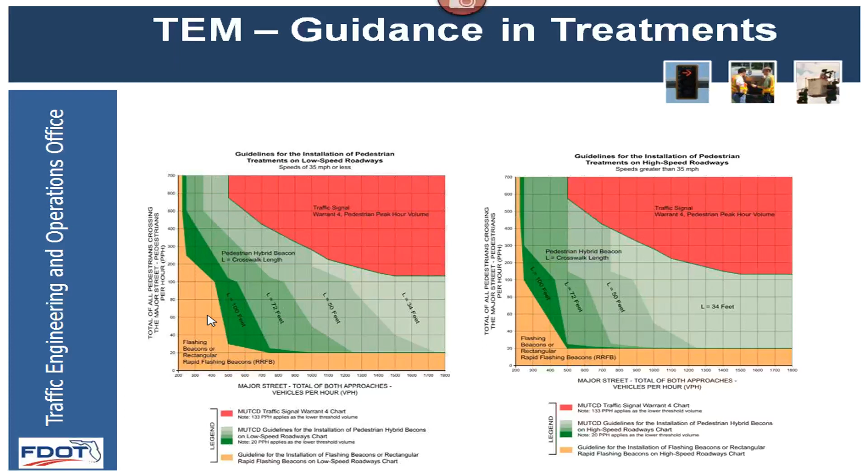One last slide before I touch on the wrong-way issue, this is a screenshot from the Plans Preparation Manual, which talks about mid-block crosswalks. I put this slide up because there is complete consistency between the various publications which the DOT has. The Plan Preparation Manual, Section 8.3, drills down into mid-block crosswalks, consistent with the Traffic Engineering Manual, Section 3.8 on mid-block crosswalks. So you get guidance from 2 or 3 different sources, but ultimately there tends to be consistency in all of those.

Since this is a safety academy, I think it's worth mentioning that wrong-way crashes, not just in the Tampa Bay area but throughout the state, have been a cause for concern for all of us. About a year ago, we started getting into pilot projects. We initiated a statewide study trying to see what best countermeasures should be applied to mitigate wrong-way crashes.

The most common applications are going to be in the traffic control devices domain. As Chris and Angela mentioned before, they are planning on implementing rectangular rapid flashing beacons, which would turn on the off-ramps when a wrong-way detection actually takes place. So not only do we make sure the minimum MUTCD guidance on the do not enter and wrong-way signs are provided on the off-ramps, we also want to use the traffic signal capability to provide a through arrow in that rightmost lane immediately adjacent to an off-ramp so that somebody does not accidentally make a right movement onto the off-ramp. This is one visual cue we think we're going to implement.

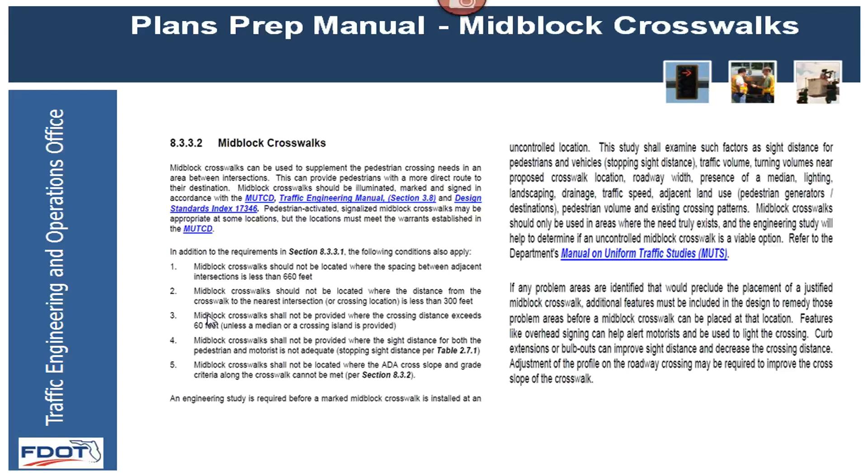That's really it. I guess we could go on, but we appreciate the opportunity to be here, and Chris, Angela, and I have done our very best. Dennis and Anthony, we can open the floor to any questions at this point.

If anybody has any questions, please type them into the chat, we will address them as they come. There was a clarification question on the rectangular rapid flashing beacon wrong-way driving application: you're filing for permission to experiment? What stage of the process are you in? Thank you for asking that question. We have been in conversation.

Conversation with the Federal Highway Administration. We got one approval, which is the District 3 in terms of the in-pavement lights, the rectangular rapid flashing beacon. I've got to double check. We were told that a response would be coming very soon. We'll double check. At this stage, let's assume that it's in the pipeline.